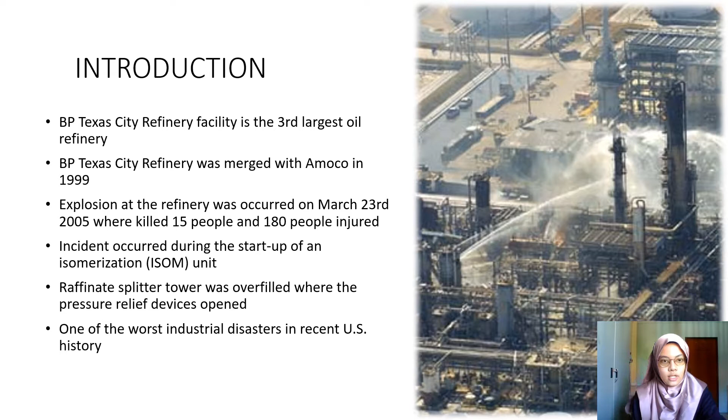Hi, I'm Hidayah. So now, I will explain further on the unit and equipment involved directly in the incident. The main unit involved in the explosion and fire in BP Texas City Refinery is the isomerization unit. In this refinery, the isomerization unit, or ISOM unit, functions to convert low quality, straight chain hydrocarbons into higher quality hydrocarbons that will be employed for blending of gasoline and for other purposes.

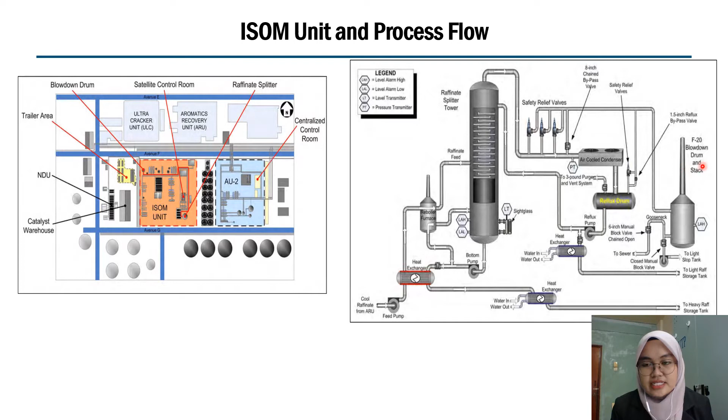So now I will further explain the incident description and the timeline of how the incident happened from beginning to end. The incident took place after midnight on the 23rd of March at 2:05 a.m. After a period of maintenance, the ISOM unit was restarted to begin its operation. The startup procedure was not following correct and strict procedures, and the operating personnel pumped flammable liquid into the raffinate splitter tower for about 3 hours without removing any liquid from the section of the ISOM unit.

At that point, a false indication from the level indicators and faults in the critical instrumentation alarm also contributed as major factors that initiated the incident. As a consequence, the raffinate tower, approximately 52 meters tall, was overfilled very quickly, and the flammable liquid overflowed into the overhead pipe. The liquid continued to run down to the pressure relief valve, 45 meters down, and the pressure at the bottom shot up from about 21 psi to 64 psi quickly.

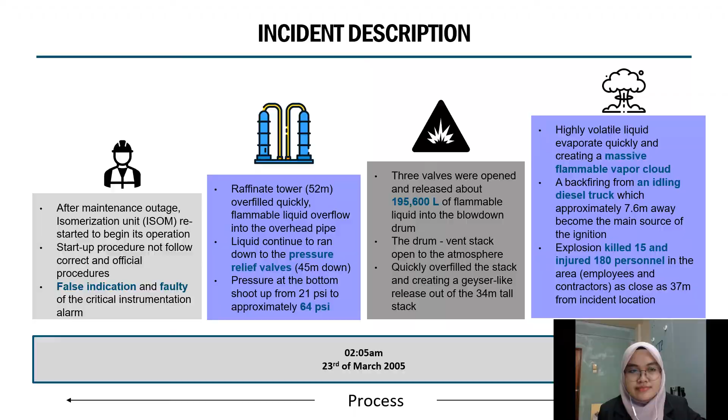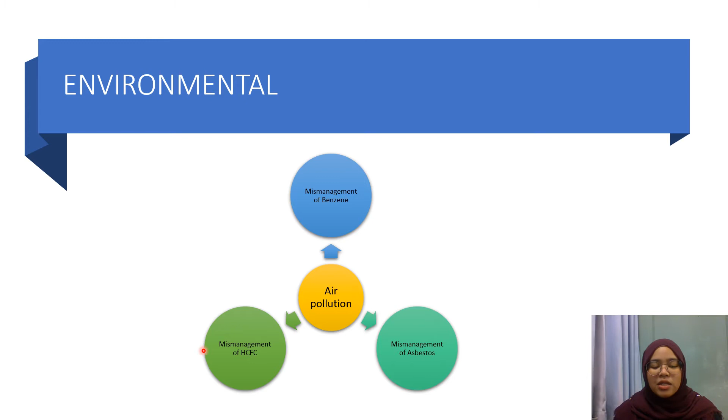Hello, my name is Anafana and I will discuss the environmental issues leading to the BP Texas explosion accident. As you may know, a refinery often causes air pollution and water pollution. However, BP Texas Refinery had caused major air pollution in Texas through their air emission. From the post-explosion inspection on BP Texas Refinery, the Environmental Protection Agency (EPA) found that BP Refinery had violated some clean air compliance by mismanagement of benzene, mismanagement of asbestos, and mismanagement of hydrochlorofluorocarbon, or known as HCFC.

Last but not least, EPA had fined BP Texas Refinery for its mismanagement of hydrochlorofluorocarbon, or known as HCFC. The refinery had used HCFC as the refrigerant in the refrigeration process and comfort cooling appliances. However, EPA suggests that BP Texas Refinery replace HCFC with non-ozone depleting cooling material.

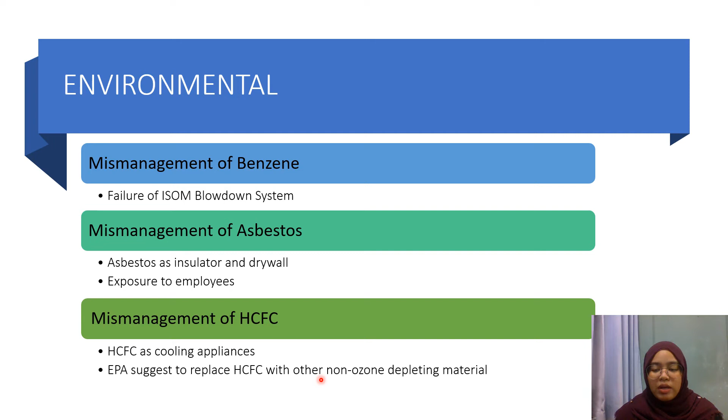Hi, my name is Ho Jiawei, and I'm going to talk about the ethical issue of this incident. So, for this incident, the ethical framework that we use is deontology theory, which states that an action is morally correct if it satisfies a moral rule without looking at the consequences of the action. Under this theory, there are two principles that BP didn't follow. The first is the universality principle, which states that one should act on a maxim only if it is universally good and serves as a general law for everyone. The second is the reciprocity principle, which states that people should respect the rational nature of humans as free, intelligent, self-directing beings and should not treat other people as a mere means to their selfish ends.

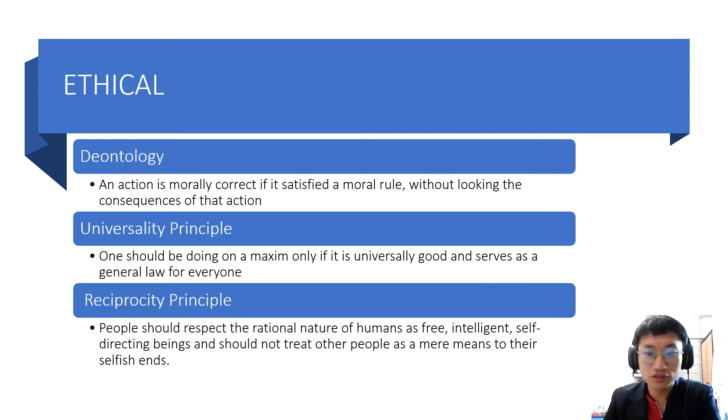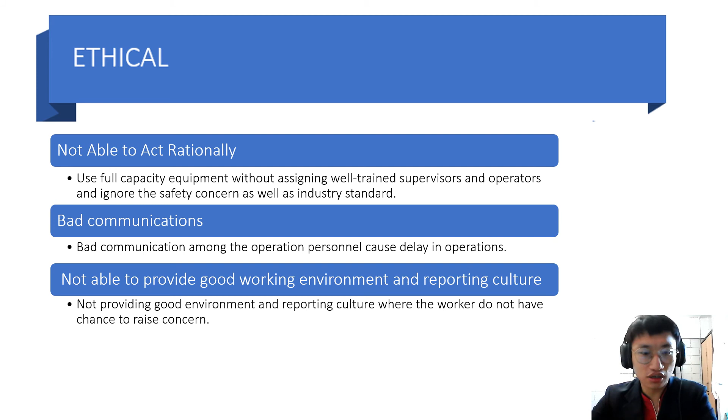Hi, my name is Solicia Elisa Jitol, and I will be presenting the recommendation part of this project. To prevent similar accidents from happening again, actions must be taken to address the environmental and ethical issues related to this explosion and fire. For the ethical part, first, BP Board of Directors should appoint a non-executive member with expertise in refinery operations and process safety to the Board of Directors and the Board Ethics and Environmental Assurance Committee. BP Board of Directors should also ensure and monitor a healthy incident reporting program. Apart from that, BP Texas City Refinery should establish a clear communication protocol to ensure the transfer of information during shift changes, conduct management of change for their organizational changes, and require the presence of competent personnel during particularly hazardous operations.

For the environmental part, BP Texas City Refinery should consider the following actions: evaluate the refinery process units to ensure safe design of critical equipment, ensure safe operation through proper maintenance and testing of instrumentation and process equipment, improve their operator training program, ensure process data procedures are updated to reflect actual process conditions, and finally, require additional board operator staffing during startup of process units and ensure that hazard assessment considers staffing level during abnormal conditions.

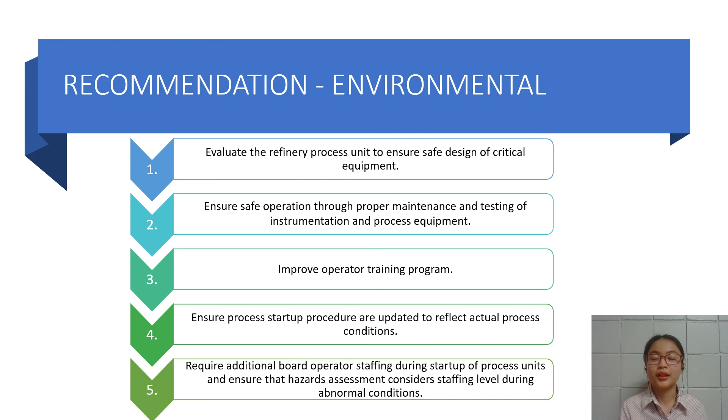Last but not least, as for conclusion, first of all, it is important to identify and define the safe operating limit for all modes of operation. Based on the analysis, this incident occurred because BP Texas City Refinery did not develop a safe operating limit of deviation for high tower level. Moreover, the isomerization unit did not address the upper operating limit for the raffinate tower level, causing the duration of the high tower level not to be recorded. Besides, inadequate operator training for the operation personnel is one of the reasons that caused this incident, where operators were not trained properly for the hazards of unit startup, including tower overfill. Therefore, environmental and ethical issues play an important role in preventing similar incidents from happening again in the future.